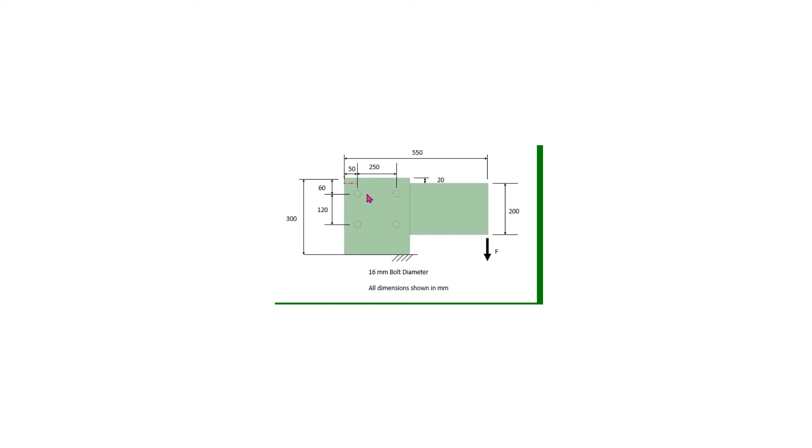In this tutorial, we are going to look at the stresses that develop in a bolted joint. The system consists of a cantilevered beam that is bolted to a vertical post with four 16mm diameter bolts. An end load will be placed at the free end of the cantilever beam. We will apply a preload to the bolts. The objective of this model is to investigate the possible modes of failure in the bolted joint.

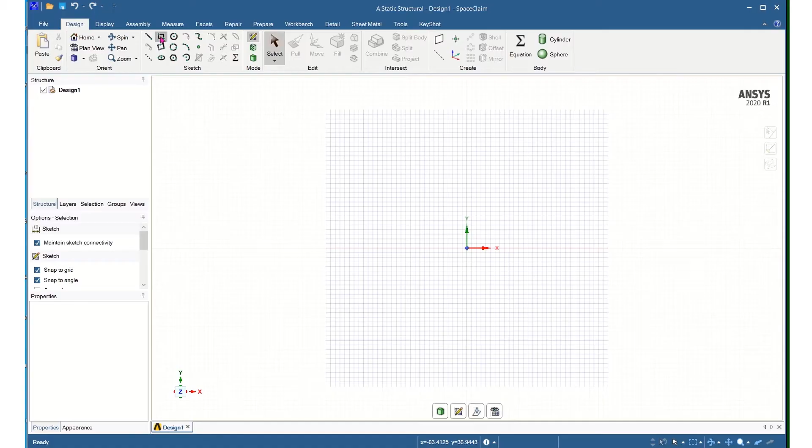Now I'll draw the cantilever beam. To do that, I'll come up to the Rectangle tool and I will come over to the origin, click on it, and I will drag this out and I will type in 550 for the length, tab, 200. And I now have the cantilever beam drawn, and I can go about drawing the circular holes.

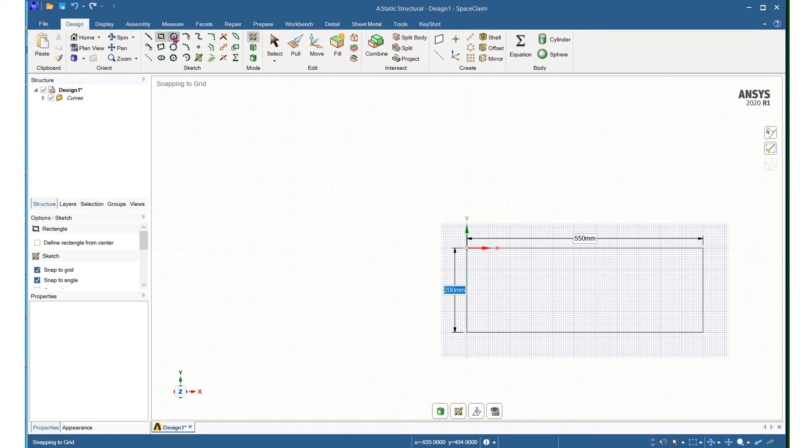So I'll click on the Circle Create tool. I'll use my middle mouse button to scroll in, and I'll use these XY coordinates down here to hover over the coordinates of where I want to put my first hole, and that will be at a -40 and a 50. So coming in here and scrolling in, I can see that my X coordinate is at my 50 and I am at -40, and that will be the center of my first circle.

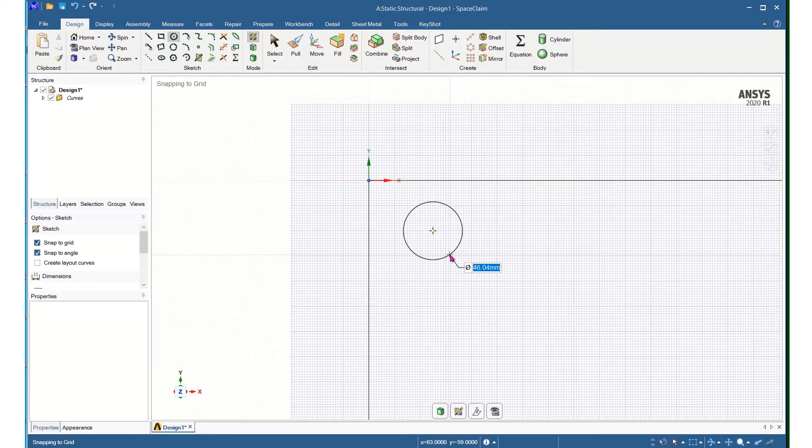So I'll click that and draw my circle, and these are 16mm diameter circles. So I'll type in 16, enter. I can now scroll back out using my middle mouse button, and I can click Escape to get out of the Circle tool, and I click Escape twice.

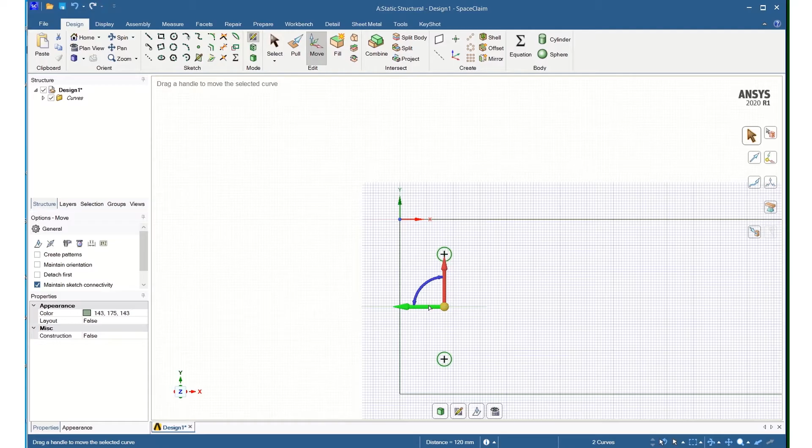Now I can come up to the Move, select this circle, and holding down the Control button, I can move it in the vertical direction, which will copy the circle, and I move it down 120 millimeters. I can now click on the top circle by Control-click, and I have both these circles selected. My move cursor moves to the center of those two, and I can click on the Control button and hold it down, and then click the horizontal move and move this 150 millimeters.

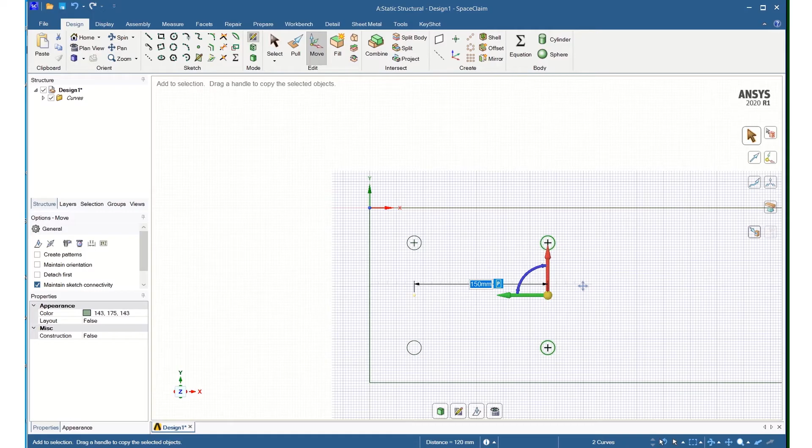I now have my four holes drawn in my cantilever beam, and I'm ready to move this and extrude this beam. So I will Control middle mouse button and move it more to the center. I'll roll out with my middle mouse roller. I'll click and rotate it. Now I'll come up and click on the Pull tool, and I'll pull this in the negative direction 15 millimeters. So type in 15, enter.

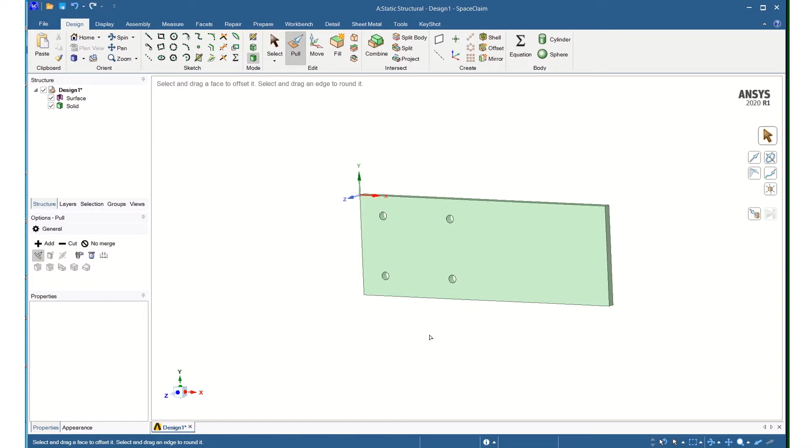I'm now ready to draw the vertical beam. So to do that, I come back up to the Sketch tool, and my sketch plane is this front plane, so I click on that. Now I can click on Plan View to orient it. I can come to the Rectangle tool and click on that, and I will offset this 20 millimeters. So from the top of the beam, I can come up 20 millimeters, and that will be my corner.

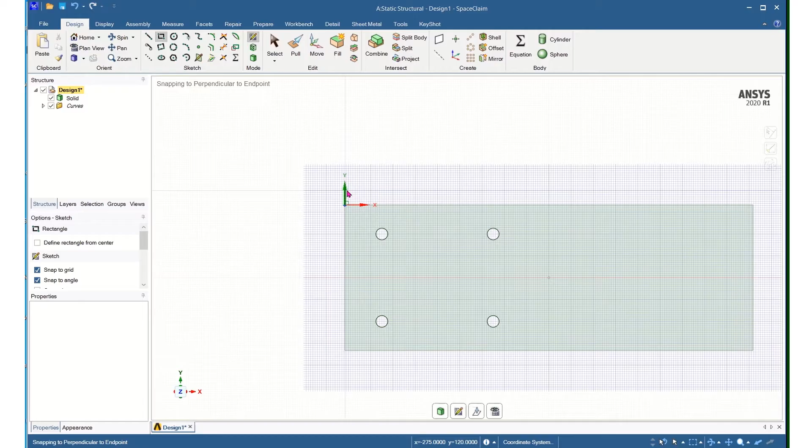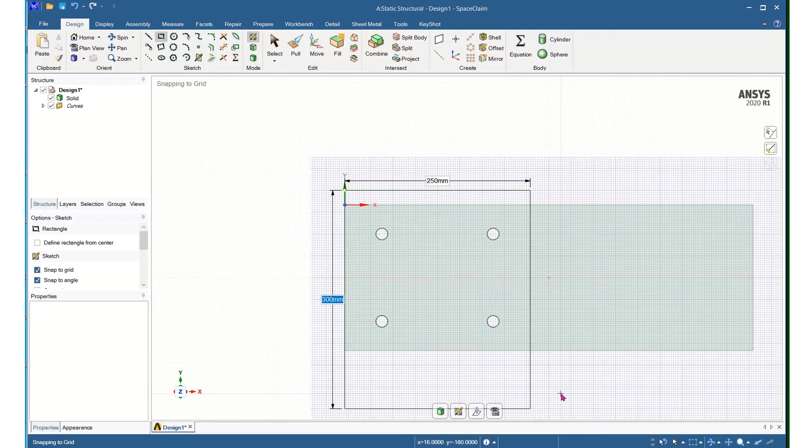And then I can extend my rectangle out, and it will go out 250, and then it will be 300 deep. I now have that rectangle drawn, and I can come and rotate this and pull it out, coming to the Pull tool and pull it in the other direction.

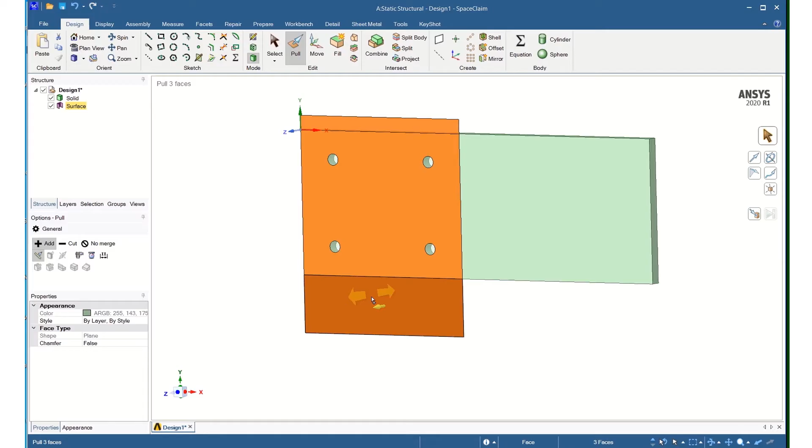And actually, when I do this, I need to select all three surfaces. So I'll click this surface, Control-click, and Control-click. And then I will come over here and click on the Add so that the area is added. Otherwise, this middle will not be shown. So I'll click on that and I'll pull that out 10 millimeters, enter.

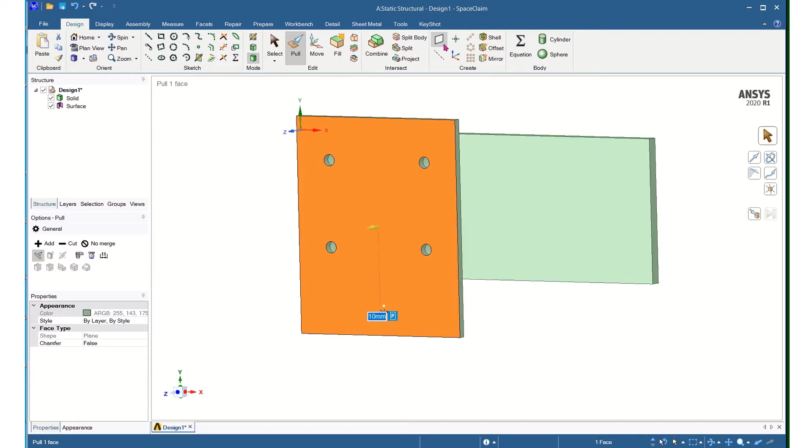You can see now that I have one solid, so when I did that pull, these two solids became one. So I need to split those. To split those, I will click on the Plane tool and generate a plane. The plane right now is on that front axis, so I need to move that plane. So I'll click Move and I'll move that plane back 10 millimeters.

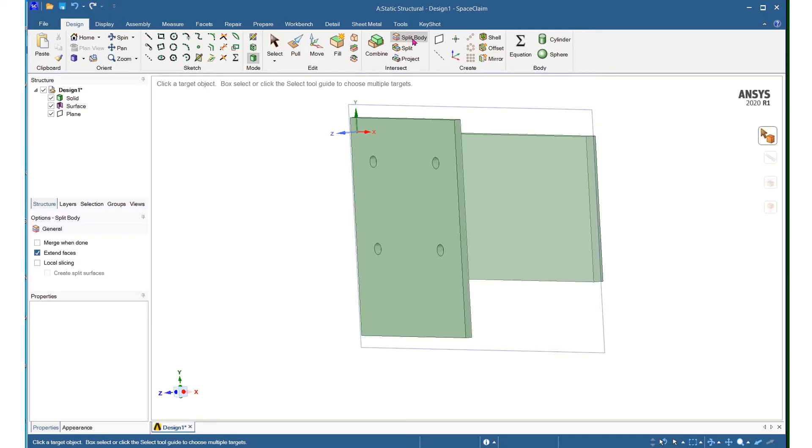Now I can come up to the split body tool and click on it, and I'll click the one solid. Then I'll come over and highlight the plane. I need to make sure I get the plane and not some other plane. The plane I just created, I'll highlight that and click that, and I can now see that I have two solids over here, a plane and a surface.

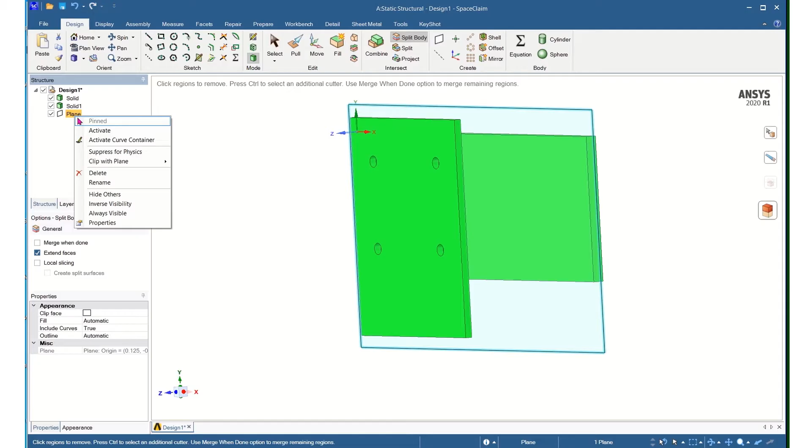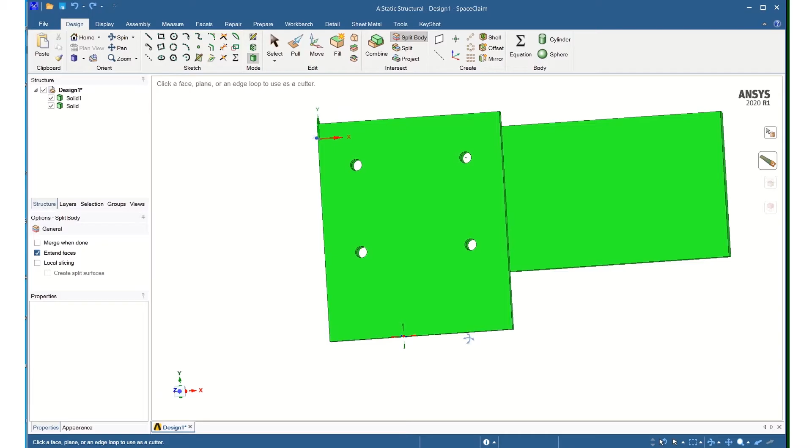I can go ahead and right click on surface and click delete, and right click on plane and click delete, and I now have two bodies. I can click on the solid and see that it's gone, and then I can see the other solid one. To undo that command, I can click the undo and see my two bodies. They have the 16 millimeter diameter holes in them, so I'm ready to draw my bolts.

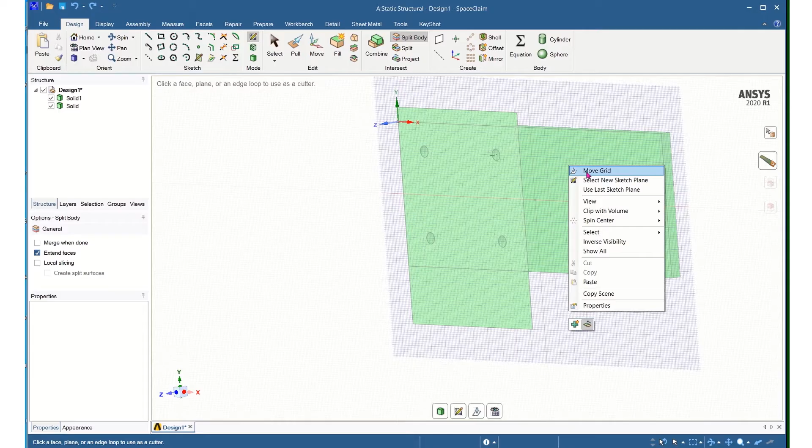To draw the bolts, I'll come back to the sketch plane and I will click on this front plane, and I need to make sure that I realize where I am, and I'm on the interface of these two planes, so I'm going to move this sketch grid out 10 millimeters. Now I can orient and look at my plan view, and I can generate a 16 millimeter diameter bolt. To do that, I'll click on the circle tool, I'll scroll in, and I will pick the center point there and draw that 16 millimeters.

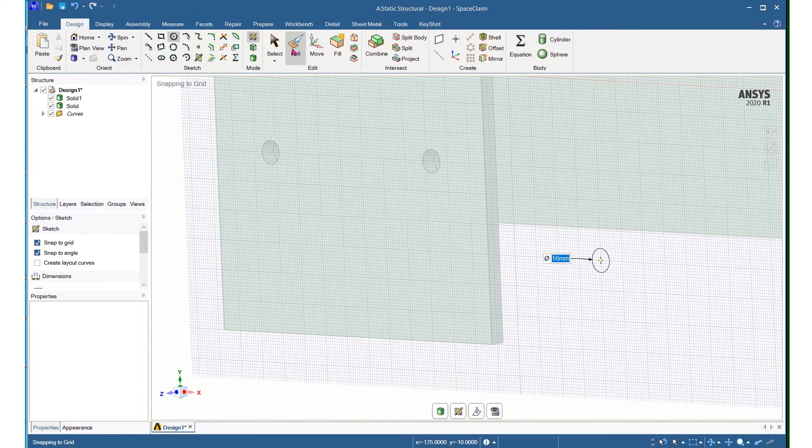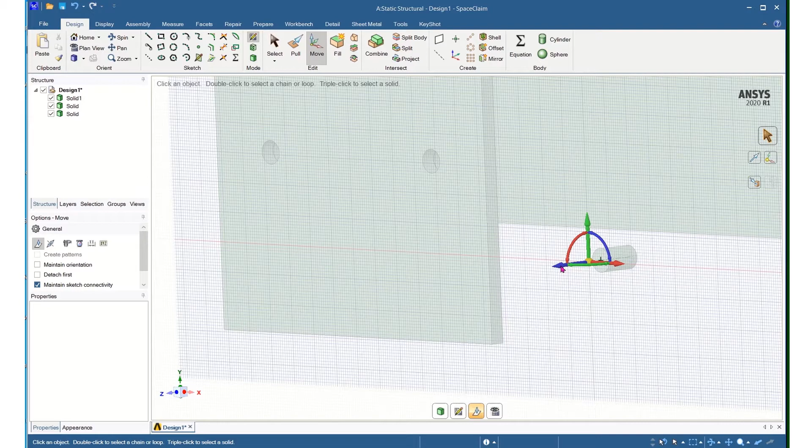I can now rotate this and pull this 25 millimeters to go through the length of the two members. So I'll click on the pull tool, come to this face and extend it out 25 millimeters. I'll now come back to the sketch tool and click on this front plane, and I will right click and move the grid, and I'll move the grid out the height of the bolt head, which is 10.75 millimeters. So 10.75 millimeters, enter.

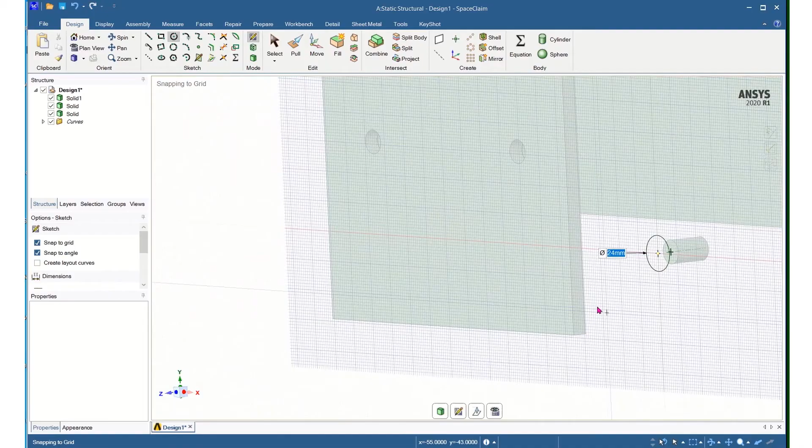And now I can come back and look at this in the plan view and click on my circle tool again, come to the same center that I used to create the bolt shaft, and draw a 24 millimeter diameter circle. Now I can rotate this and come to the pull tool, click on pull, and I'll click on this face, click the up to button, and then click on the top face of the bolt shaft. And that creates my bolt.

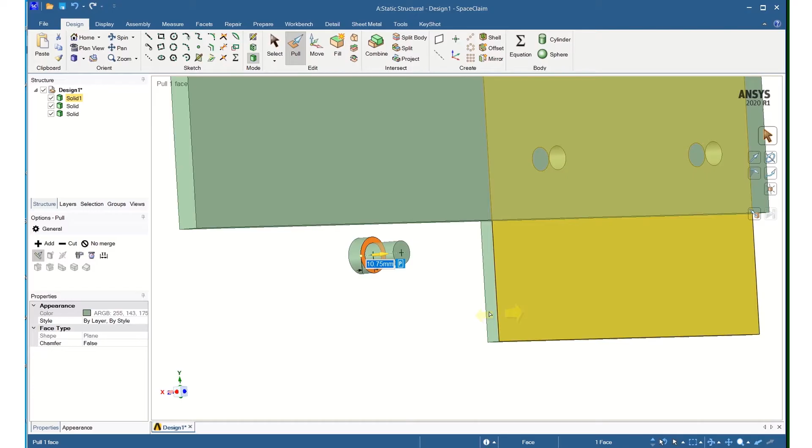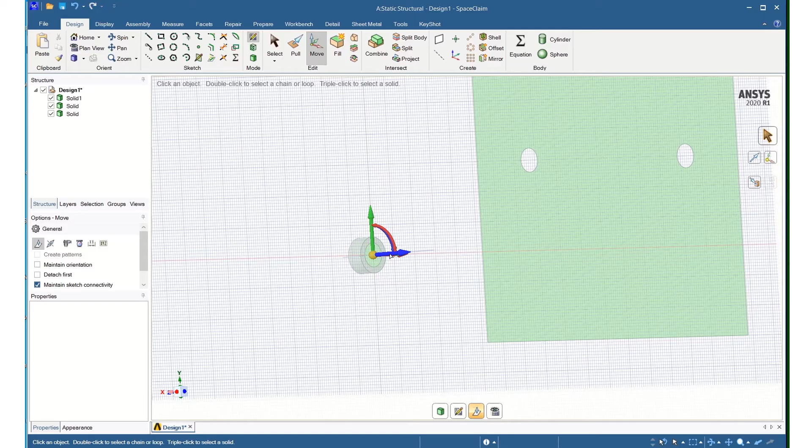To generate the nut, I'll rotate my structure so that I'm looking at it from behind. I will click on the sketch grid, and I will move this sketch grid out to the back side of the plates. So I will need to right click and click on move grid. Now I'll need to move this the 25 millimeters to get through the two members, plus the 14.8 millimeters, which is the thickness of the nut. That will be a total of 39.8 millimeters. So I'll move this sketch grid out a distance of 39.8 millimeters.

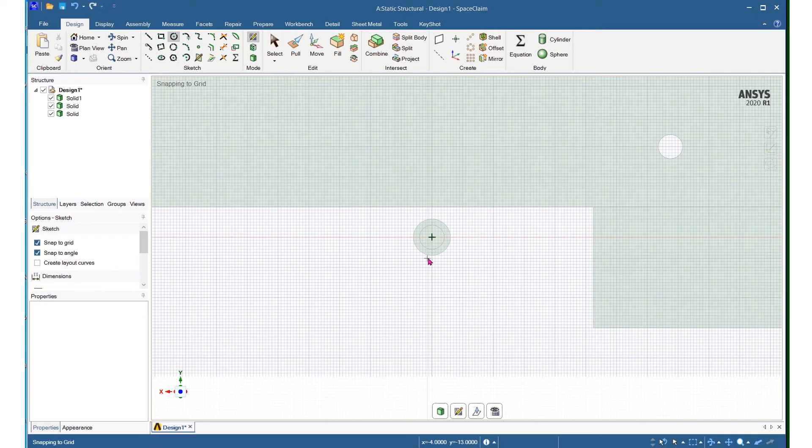Click enter. I can look at it from the back, so I'll rotate this around and click on the negative Z direction. I'll come to my circle tool and I'll use the same center. The nut diameter is the same diameter as the bolt head, which is 24 millimeters. I'll now create another 16 millimeter diameter so that I can keep the bolt going through the nut as a separate body. So I'll click on the center again, pull out, and type in 16.

Now I can middle mouse button and rotate this, and I will click on the pull tool and pull this interface up to the base of the existing bolt shaft by using the up to tool. Then I'll click on that face, and now I have extended my bolt out through my nut. Now I'll click on the nut and pull it a distance of 14.8 millimeters. And I need to be careful with that because now that has merged.

I want to make sure that I undo that, and when I do that pull, I want to make sure I have on no merge in my options under pull. So I now have on the no merge. I can grab this and I can pull this up 14.8, enter, and now I have kept my nut separate from my bolt.

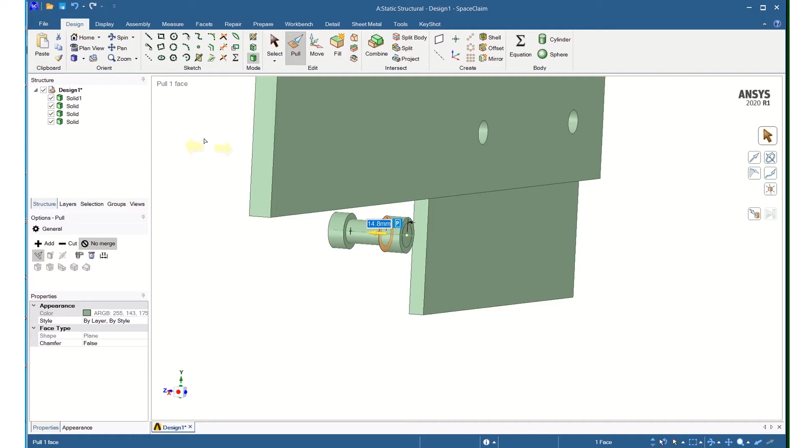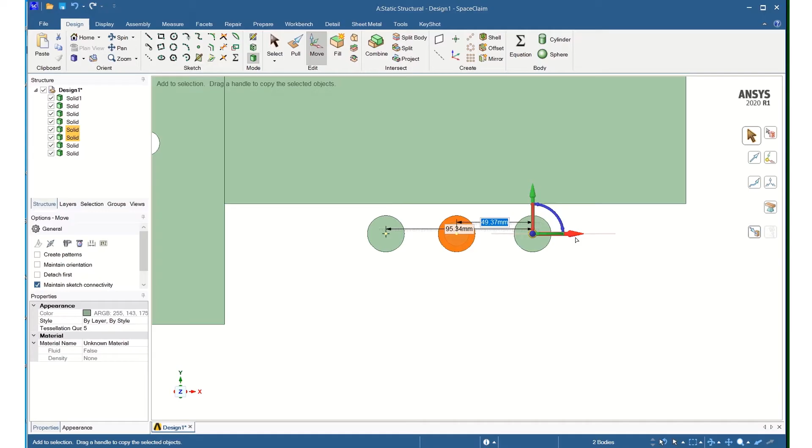I can go ahead and reorient this so that I'm looking at it in the Z direction, and I can come to my bolt and copy that. So I can click over here and then control click this as my nut, and I can come to my move tool and hold down the control button and move that and copy it, and I will do that 2 more times. I now have all of my bolts and nuts created, and I'm ready to move them.

To move the bolts, I'll click off my structure, and then I will roll out and middle mouse button and rotate it a little bit. Then I will come up to the assembly along the top menu and click on assembly. Then I'll click align.

I'll come down here and hover over the bolt till I get the middle line, the center line, and I'll click the center line, and then I will come over and find the center line of the hole and click that center line, and that will move the first bolt. I can now come to my second bolt and again hover over the center line, come up to my structure, my plate, and hover over the center line and move my second bolt.

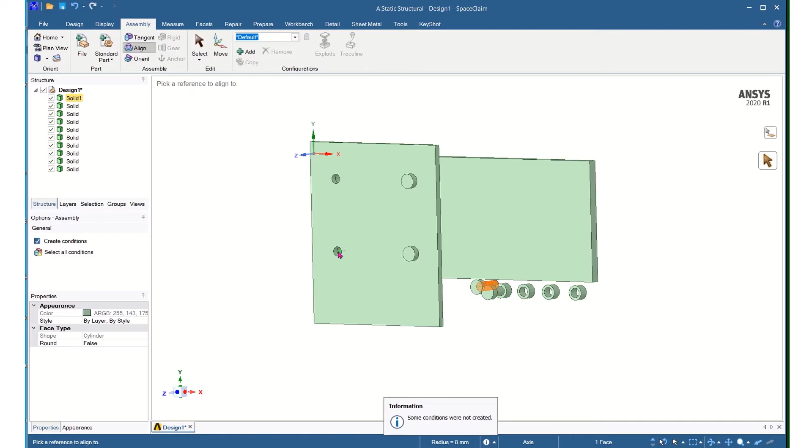And I will do that again for the third bolt. So I'll hover over the center line, find the center line in the hole and hover over it. Then my last bolt, hover over the center line, click it, and then hover over the center line and left click. And I have now moved all of my bolts. The bolts were developed so that the head of the bolt will lie right on top of the plate as it should be.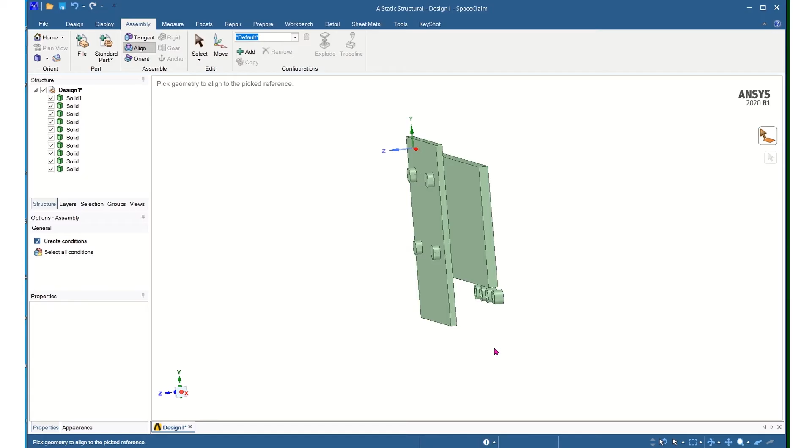Now I'll go ahead and move my nuts. So to do that, I'll use the same align tool where I click on the center of the nut, and then I'll come and find the center of the bolt and click that line, and it will move my nut. So again, I click on the center line of the nut and come up and click the center line of the bolt, and I picked the wrong center line there, so I need to redo that one.

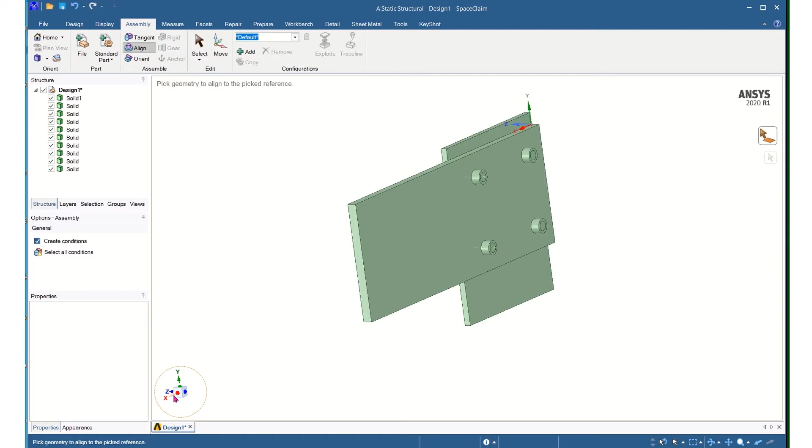I'll click the center line and then come up and click the center line and move that. Then I'll click the center line again, move my next nut, and then finally I can move my last nut. And I have created my geometry. I can see that I have all of these solid bodies. I could rename those, which might be helpful, but I'll just do that in Ansys Mechanical, so I can orient my structure to look at it in the Z direction, and I'm ready to move to Ansys.

After opening Mechanical, we can see our beam and our plate and our bolts have been brought in. If I click over on the structure tree under geometry, I can open the geometry and click through and see the various components of my model. I'm going to rename these because the names will be useful in later analysis. So the top one I will click on and then press F2 on the keyboard and type in beam. The next one I'll press F2 on the keyboard and type in plate.

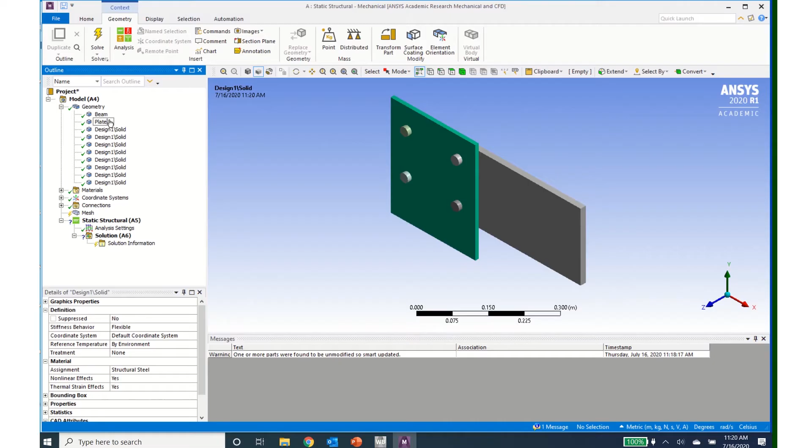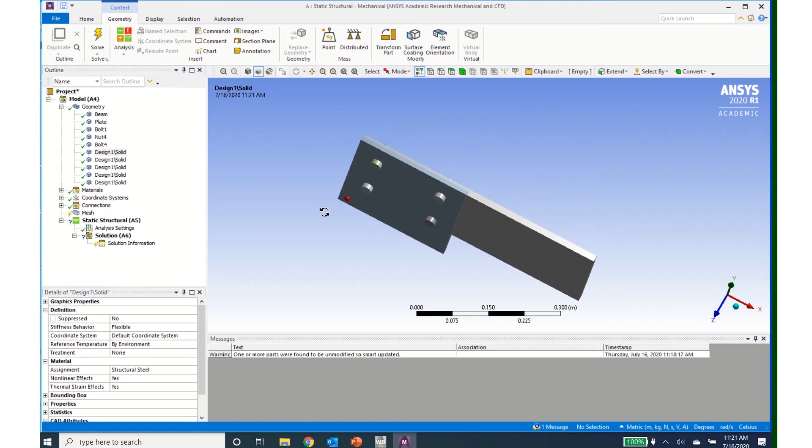Then bolt 1. Now when I click on this one I don't see it, but if I rotate my model I can see that it's that nut on the bottom, and so I will actually call that number 4, F2 nut 4, and then F2 bolt 4. Now I need to rotate this around, and this will be nut 1, so F2 nut 1.

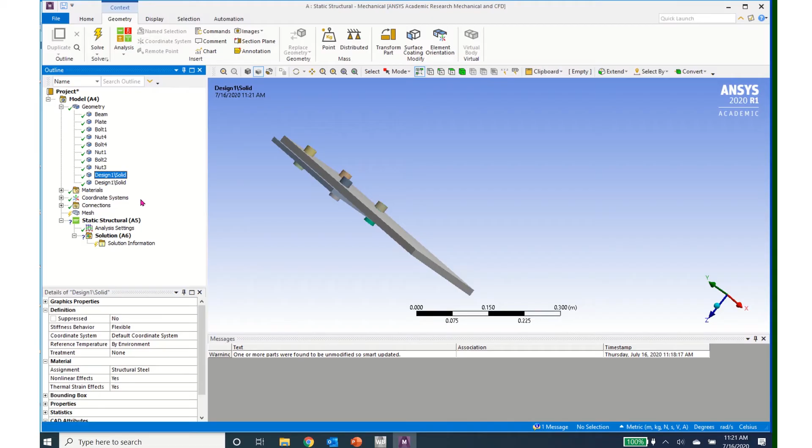Then this will be, click on it, F2 bolt 2. F2 nut 3. F2 bolt 3, and finally F2 nut 2. Now I have all of those components named, and I'm ready to move on.

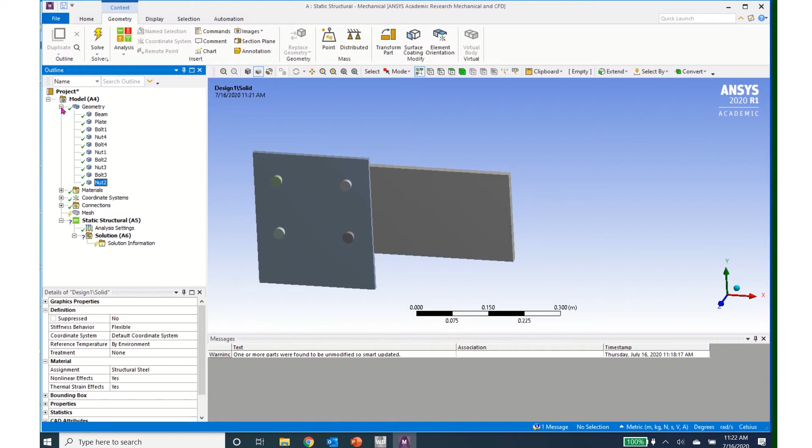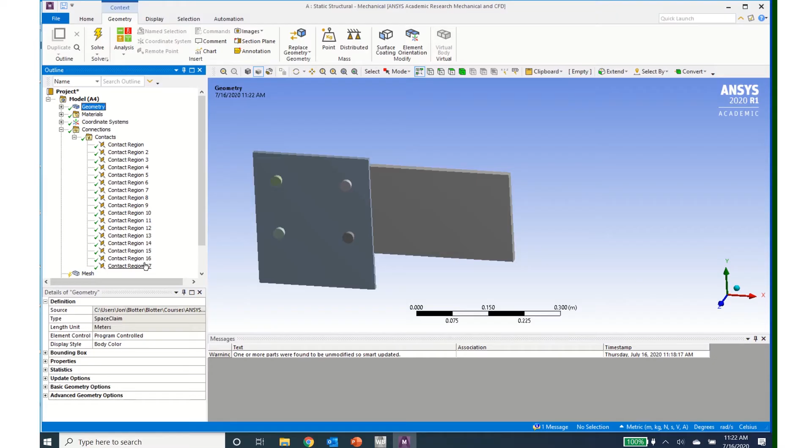So I'll minimize the geometry window, and I'll come down to connections. Connections is where Ansys puts the bodies in contact that it thinks should be in contact with each other. So if I open up the contacts, I have a whole bunch of contact regions here, and these have been automatically generated by Ansys, and I need to go through and check those. So to do that, I click on my first contact region, and it shows me this red face, and then on the back side it shows me this blue face.

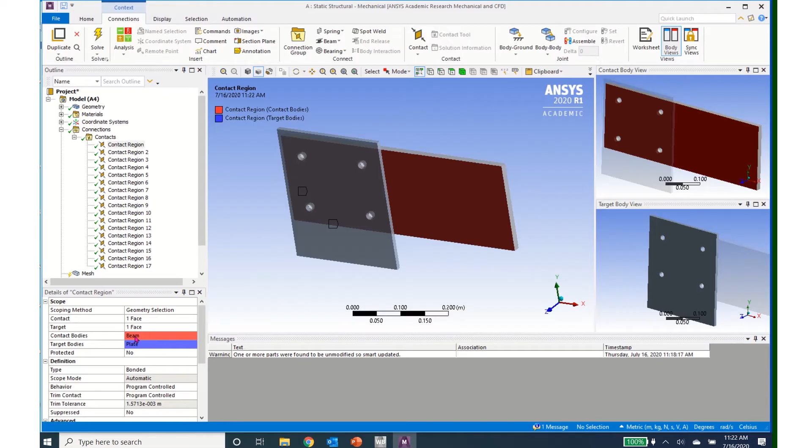Those two faces are the contact for the red face and the target body for the blue face. And it's telling me that those two faces are in contact. It's also telling me that they are in contact with a bonded type of contact. And these two members are certainly not bonded. Bonded means they're essentially welded together and hard connected, where these would be more of a frictional contact. So I need to click on this window, open it up, and click frictional.

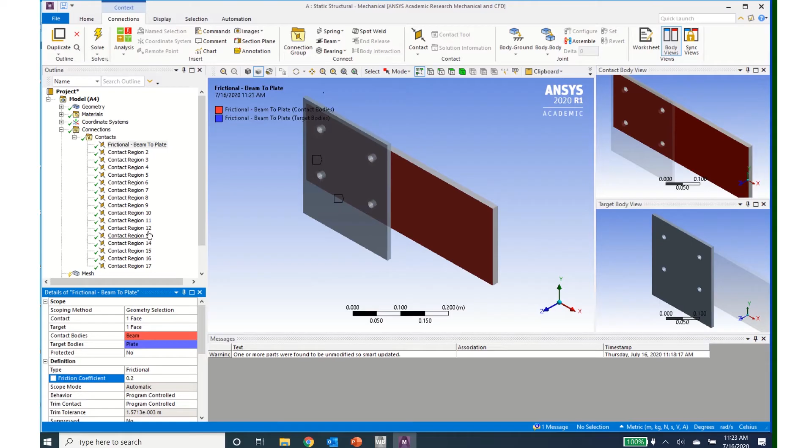And I can see now when I do that, it uses the names that I gave it in my geometry description, and it says I have the beam to plate contact, and it's frictional. It's also asking me for a friction coefficient, so for steel on steel, I'll use 0.2, enter. Now, since most of my contacts are going to be frictional contacts, I'm going to select the next one, shift click the bottom, then change all of them to frictional with a friction coefficient of 0.2, enter.

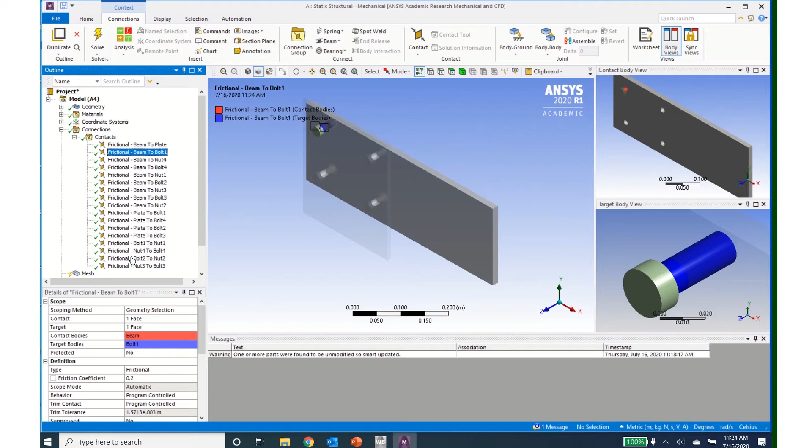And now I can see that it has named all of these based on the names I gave it in geometry. And the only ones I need to come and change are the nuts to the bolt, where that will be a bonded connection. So I'll come to nut 3 to bolt 3, and I will change this down here from frictional back to bonded.

And then bolt 2 to nut 2, I'll change that back to bonded. Nut 4 to bolt 4, back to bonded. And bolt 1 to nut 1, back to bonded.

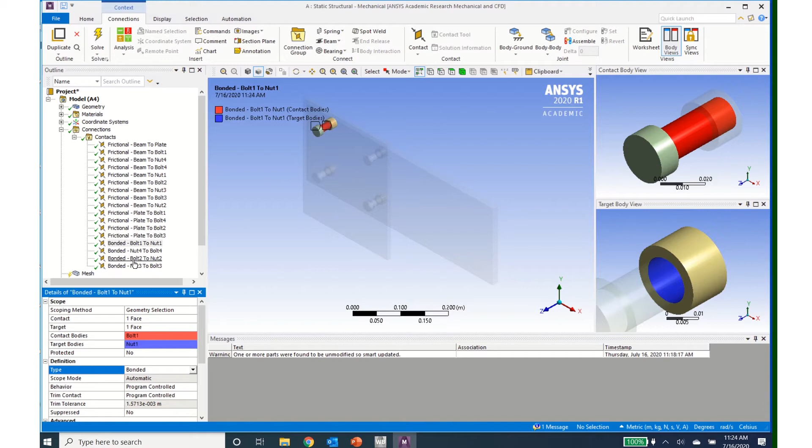The other thing I need to do is go through all of these and ensure that all of my connections have been made. If I need to add any, I come to Contacts and right-click on Contacts, click on Create, and I can create a contact tool, or I can come to Insert, Manual Contact Region, and enter in a new contact. But Ansys did a good job here, and it got all of the contacts that I needed. I'm now ready to move.

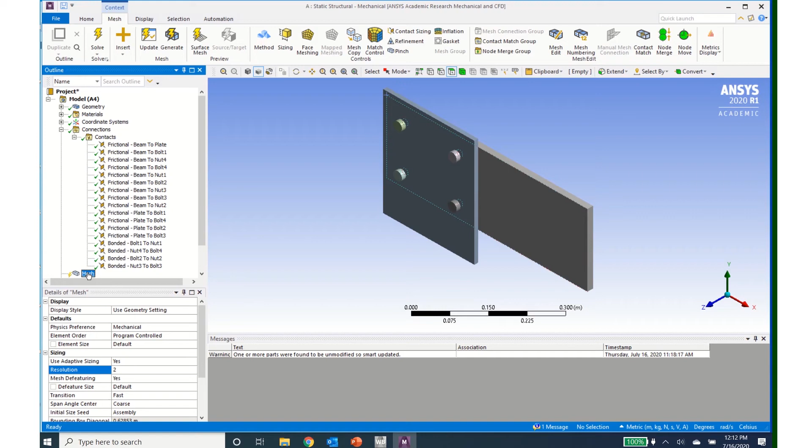To mesh the structure, I'll begin by clicking on Mesh, then come up and generate the default mesh and see what it looks like. This mesh is too coarse, and so I'm going to want to refine it. The first thing I will do is come down and refine the mesh by increasing the resolution here to a resolution of 2. So 2, enter. My mesh goes obsolete, and I can click Update.

This mesh is beginning to look a little bit better, but I'm going to enter in some more specific controls. So under meshing, I will come to refinement, and I'm going to refine the mesh around these holes. And so I will come over and up to the geometry and click on my first bolt and right click and click hide body, and then bolt 4 I'll right click and hide body, bolt 2 right click and hide body, and bolt 3 right click and hide body.

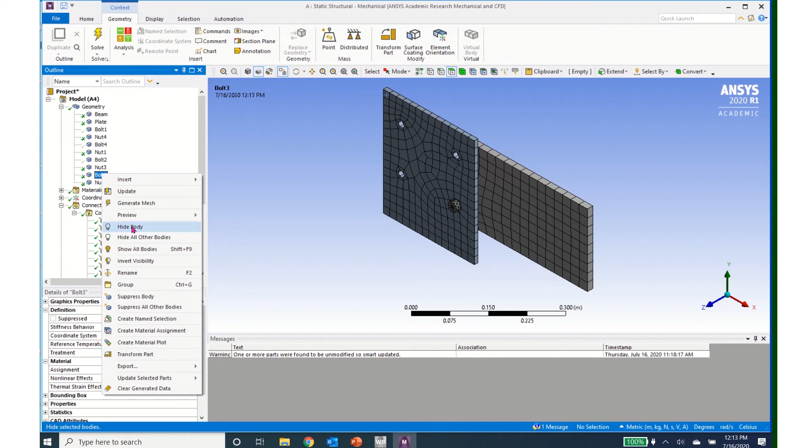Now I can see inside of those holes and I can select those faces for mesh refinement. So I'll come back down to this refinement and I'll click on the surface select. I'll need to control and move and middle mouse button rotate so that I can see those surfaces. I'll click the first one, then control click, and I should get the hole in the plate and the hole in the beam. So I'll have a total of 8 surfaces.

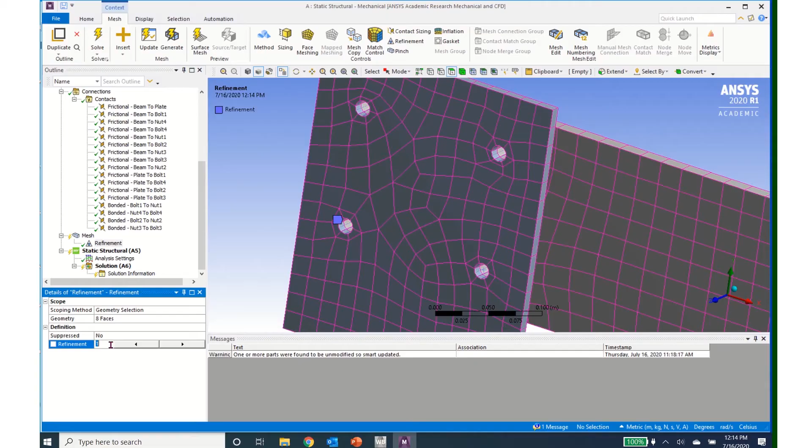Then I'll come over here and click apply, and I'll increase this refinement to 2, enter. And now I can see my mesh went obsolete again. I can click update. So I can see my mesh looks a lot better now around the holes. The mesh is in the 2 plates, or the plate and the beam.

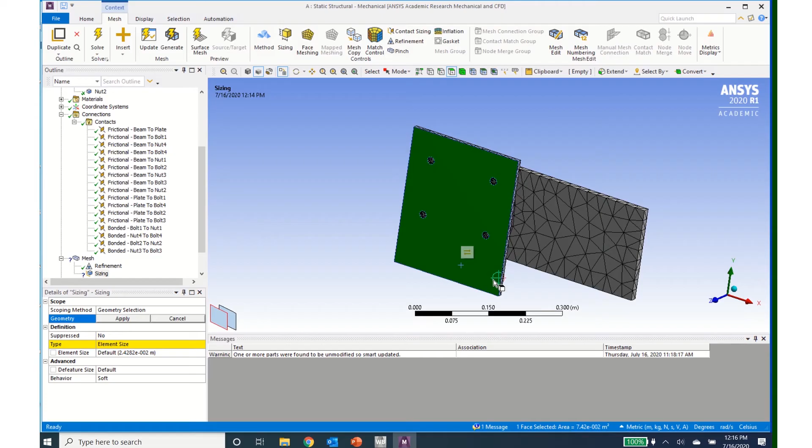Now I'll refine using a face sizing. So I'll come up to sizing and click on sizing. Then I'll click the faces of my plate and my beam. So click to select that face, control click. Now spin it around and control click these other 2, and I can click apply, and the default size here I will put in as 0.01, enter. Now I can update this mesh,

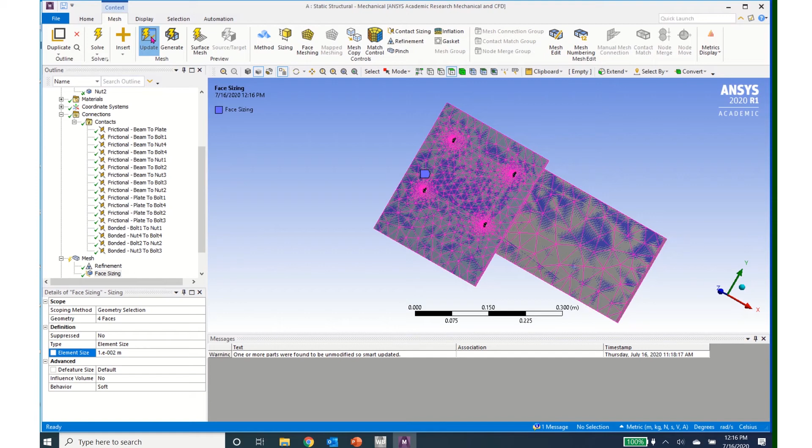and that mesh looks pretty good. The mesh refinement around the holes looks great. One thing that you want to note is that it's never good to just have a node on the surface and on the back surface. You need to have a node on the middle line, or some type of a breakup at least going through the thickness of the members.

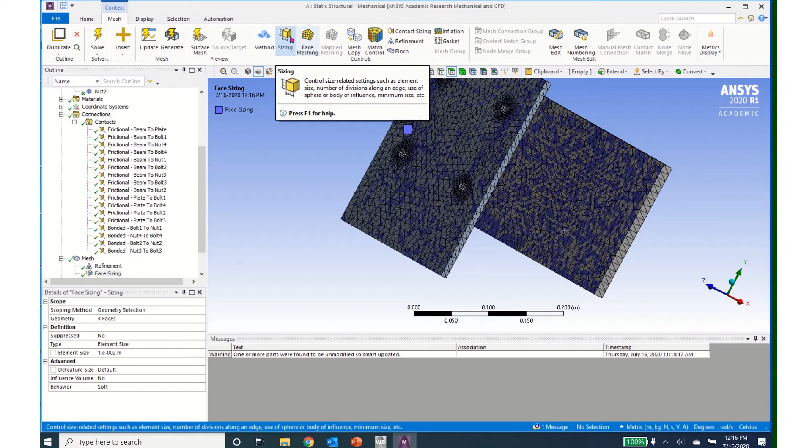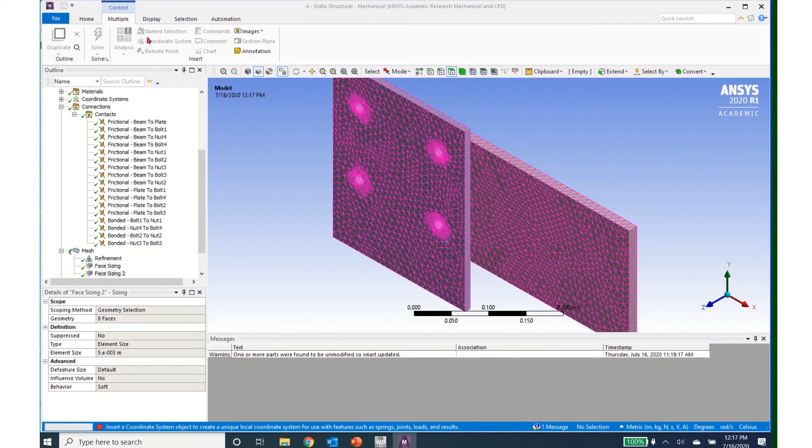So I'm going to go ahead and enter in another sizing, and I'll click on all these faces. So click the first one, then control click, and then I'll rotate it around and make sure that I get all of the faces. Again, I should have 8 of them. And I can look at my mesh again, and I'll set the element size here to 0.005. And now I'll do one more mesh update and see what that mesh looks like.

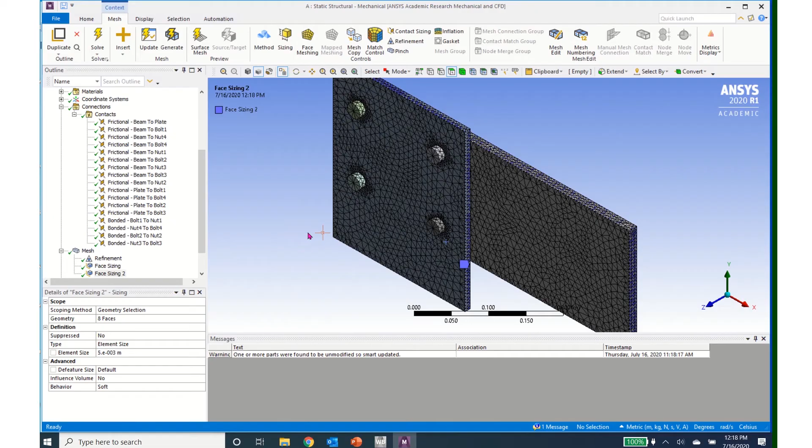You can see the progress of the meshing down here. So I now have elements going through the thickness of my members. I have good refinement around my holes. So that all looks good. I can right click and then click show all bodies, and my nuts and bolts are back.

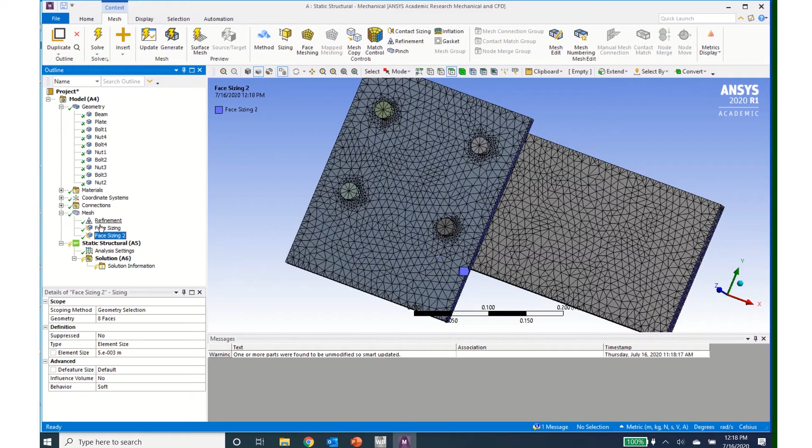I don't need a lot of refinement on my nuts and bolts, as I'm not too concerned about the deformation or the stresses in the nuts and bolts. I'm more concerned about the stresses in the beam and the plate. So my meshing is complete. I'm ready now to go and enter in my static structural boundary conditions. The boundary conditions that I will use, I'll use a fixed boundary condition down on this bottom face of the plate.

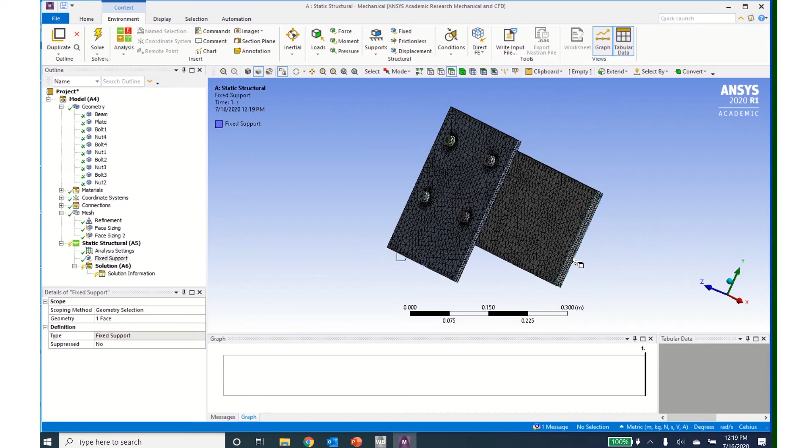I'll come up to fixed support, select that bottom face, click apply, and then I'll apply a load eventually out here on this face. But first I'm going to look at the pretension in the bolts, so I'll hide the beam and the plate by right clicking on each and selecting hide body, leaving just the bolts visible.

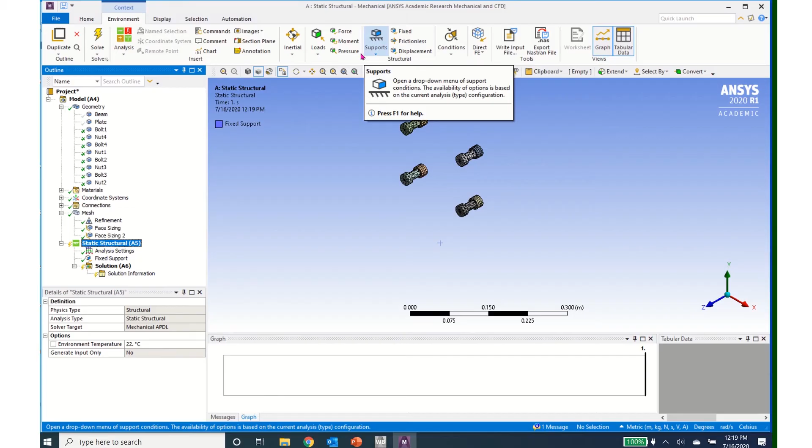I can come up to static structural, go to supports and loads, and click on bolt pretension. Then I'll zoom in, click that surface of the bolt, come over and click apply.

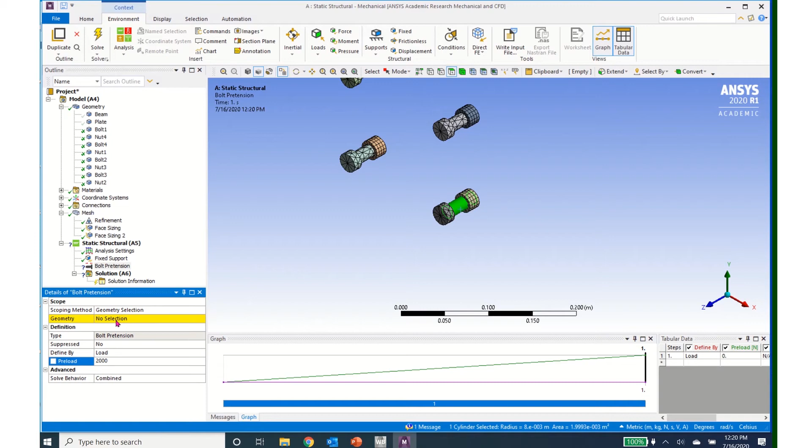I'll apply a preload of 2000. It doesn't look like I got it selected properly, so I'll click apply again, and I can see that I get the one face. You can't select all four faces at the same time - you have to do them individually.

So I'll click on this face again, come up to loads, enter another bolt pretension, click apply, and enter 2000 newtons. I'll repeat that for the remaining bolts - click on the surface, loads, bolt pretension, apply, enter 2000. I now have the pretension applied in all four bolts.

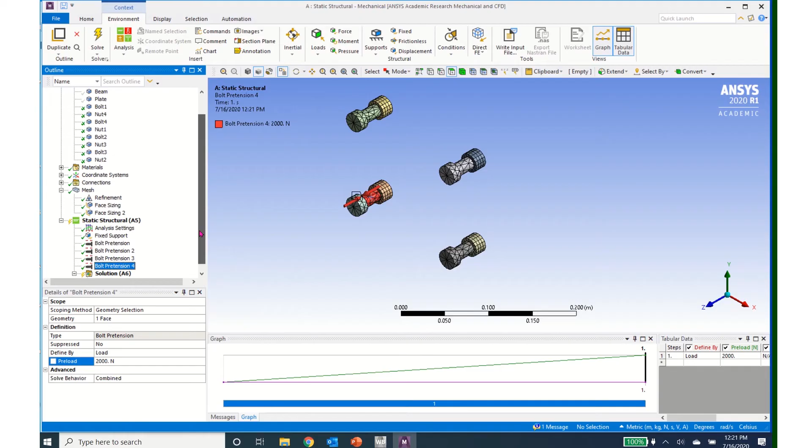I can come and define the outputs, so I'll click on solution, look at stress - equivalent von Mises - and look at deformation and total deformation. I'm now ready to go ahead and solve this model, looking at just the effects of the preload.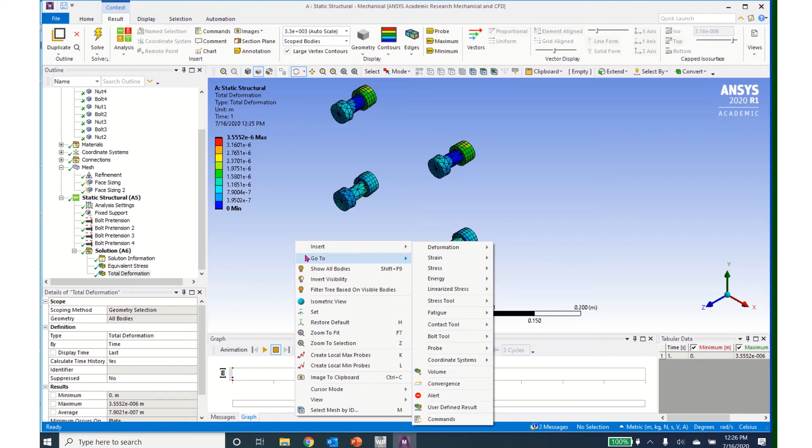This will take a while to solve, so while it's solving - once a solution has been obtained, I want to come over to the window, right click, and click show all bodies. Then I can click on equivalent stress and zoom in to look at the stresses around the bolt.

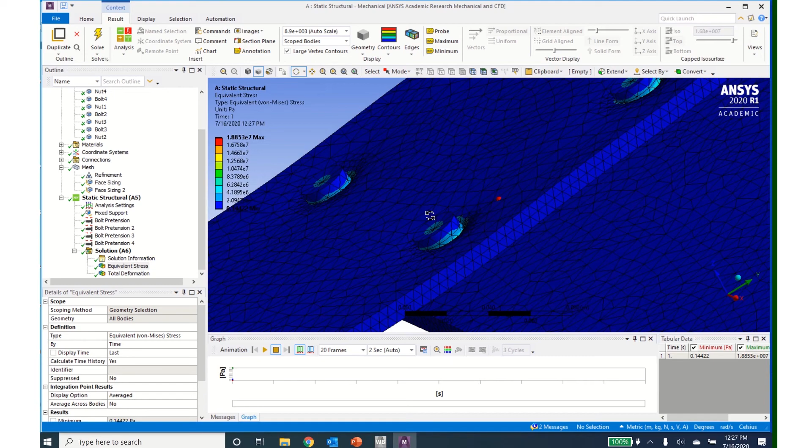I can see that this bolt has compressed that material and has been sucked down in. I can see on the back side that my nuts have been compressed down in, and all of that looks good - it looks like what a preload should look like.

I can come up to bolt 3, right click, and click hide body. Then I can click on equivalent stress again and more clearly see the stresses in the hole and around the hole without the bolt being in the way. Again, that looks like what I would expect a preload to do, so my preload looks okay.

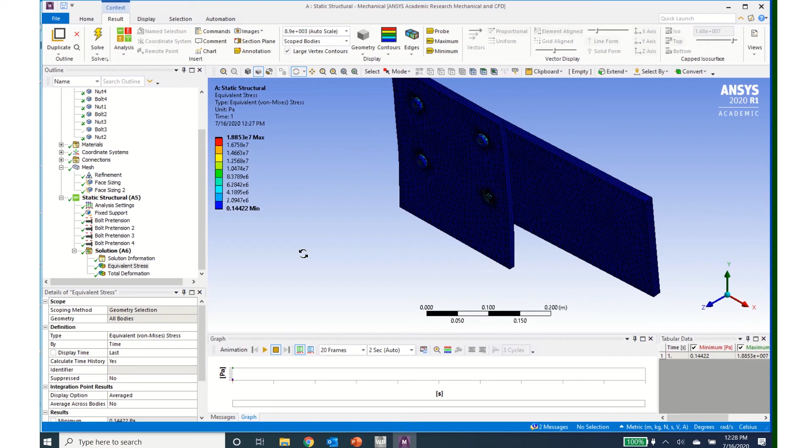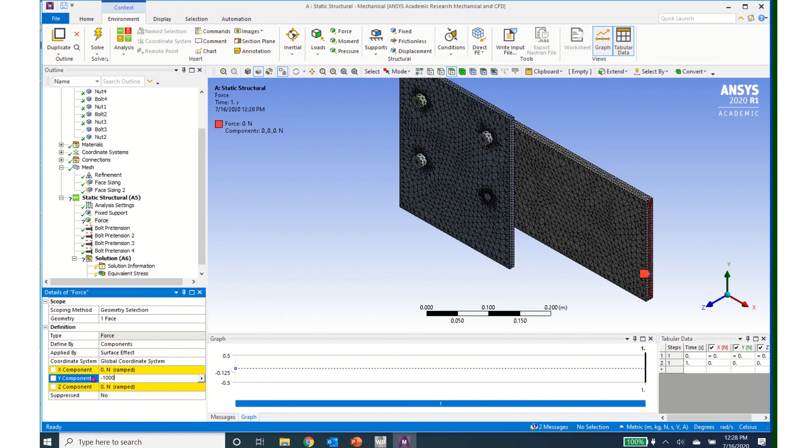I'm going to middle mouse scroll this out, click on ISO, and now come back to static structural and add a force to the end of this cantilever beam. I'll click on it, click apply, change from vector to components, and apply a minus Y component of 1000. Now I'll click enter and resolve this with a 1,000-newton load.

After the solution has been obtained, we can investigate the various modes of failure in the bolted joint. If I turn to look at the structure straight on, I can see that the largest equivalent stresses occur in this region and then over here in this region.

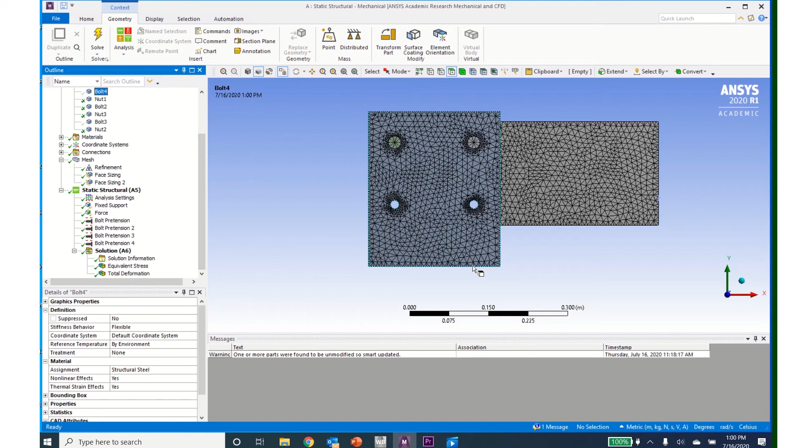If I come up here to bolt 3, right click and hide body, then click on bolt 4, right click and hide body, I can look at the plate and the beam a little more carefully. So now I'll rotate it and click on equivalent stress, and by zooming in I can see there is a higher stress right here in this region.

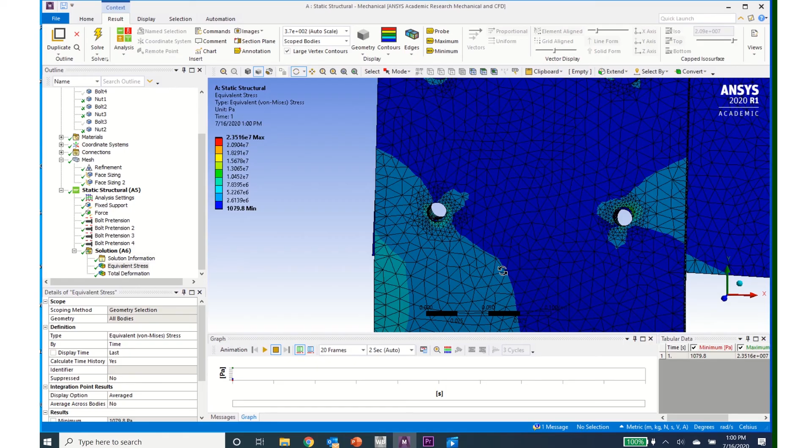It looks like there is some bearing failure on the plate, or that's where the stresses would be largest - in that direction, pulling out like that. I can come over to bolt number 4 and also see there's some bearing stress down in here. In terms of shear tear out, that doesn't look like a mode of failure, and the other failure modes don't look to be a significant concern on this front plate.

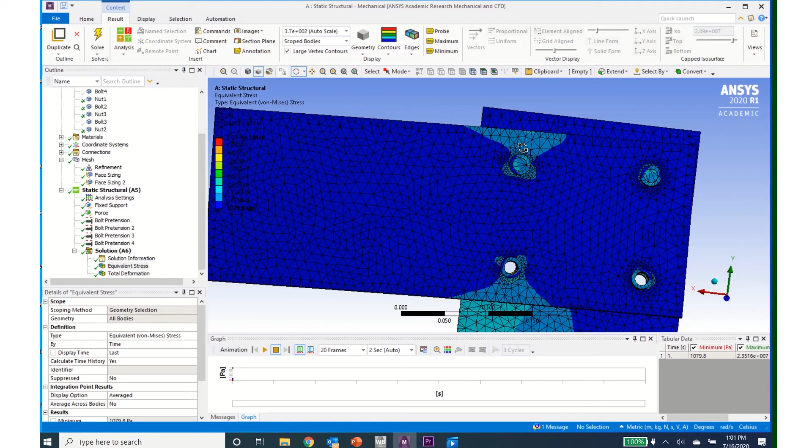If I rotate the plate around and look at the back side, I can see here that likely this would be a tensile tear out on this top member, and this will be a compressive stress down here. I could hide these nuts and do more investigation, but likely we would have a tensile tear out in this region as the failure mode.

So hopefully this has given you an idea of how to use finite element analysis to investigate possible modes of failure in bolted joints.

We also want to introduce the load stepping feature in this tutorial. Load stepping allows us to turn forces on or off, or change them, during the solution process.

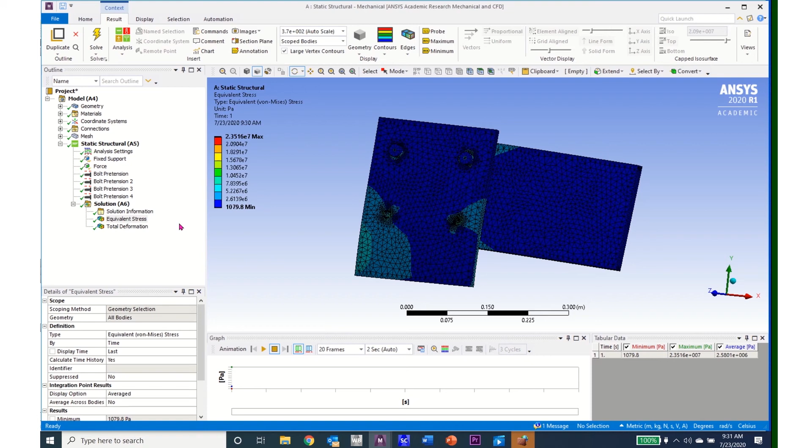To do this, we come to Analysis Settings and down to the number of steps, where the default value is 1. I'll change this to 4. Now in the tabular data I have a column with 4 rows for input, and a plot showing my input, which we will add loads to in just a second. I'll leave the current step number as 1 and the step end time as 1 second, but I'll change auto time stepping from program controlled to off.

This lets me define my own load stepping, and I'm going to select the number of sub-steps as 5. If I want to do this in terms of time, I can click this box and select time, then use an increment of 0.2 seconds as the default, but I can change those as desired.

Now I'll come up to fixed support, and I see that there is no tabular data, meaning the fixed support remains as it is through the entire solution process.

When I click on my force, I can see there are 4 columns where I can change the load. I'll change the load for the first time step to 0, then increase it to minus 1,000, and leave it as minus 2,000 and 2,000 for the remaining load steps.

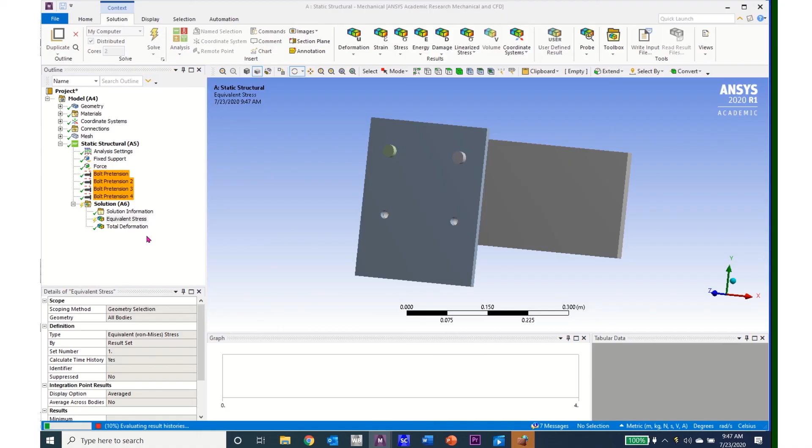So I right click on equivalent stress and click Evaluate All Results, and it'll do that fairly quickly. Now I can see the results for the first time step, and I can see that the only thing applied is the preload on the bolts.

I can then come and change this to the second time step and enter that. I see my values here have turned pink, meaning they need to be updated, and my equivalent stress again needs to be updated.

So I'll click on equivalent stress with my right mouse button, then click Retrieve this result. These results have been updated, and I can come down and see these values. I can see where I'm propagating along my curve. Right now I'm at point 4, so I haven't applied my load yet.

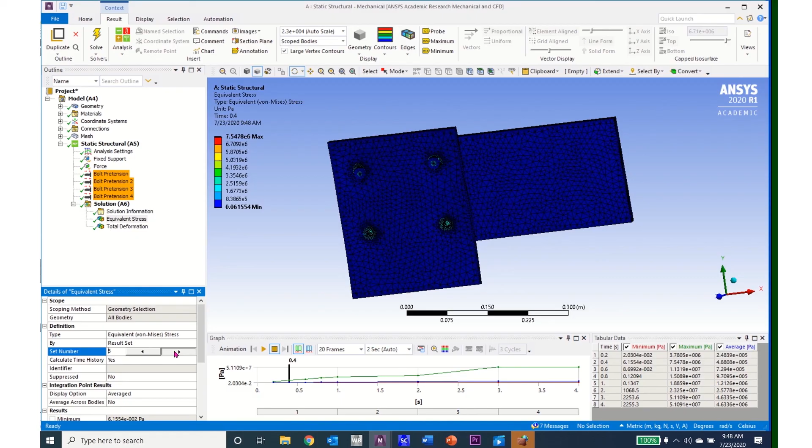I can come down now and go to step number 6, for example, click enter, then right click and retrieve this result. Now this has moved out to the 2-second time slot, and I can see my load has been applied, along with the stresses and deformations.

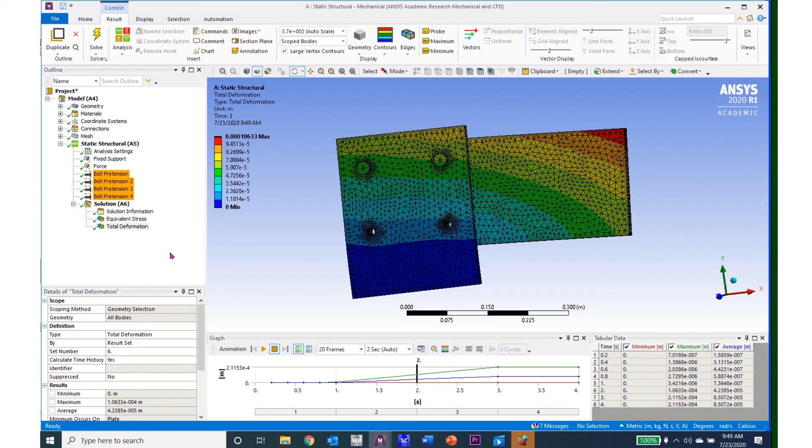Now the deformations are still showing the last time step, so I would need to come back and change that to results set, then change the set number to the desired set number I wanted to look at. Then I would have to right click on that and evaluate results to look at the deformation as well. So I hope this helps with using load stepping.